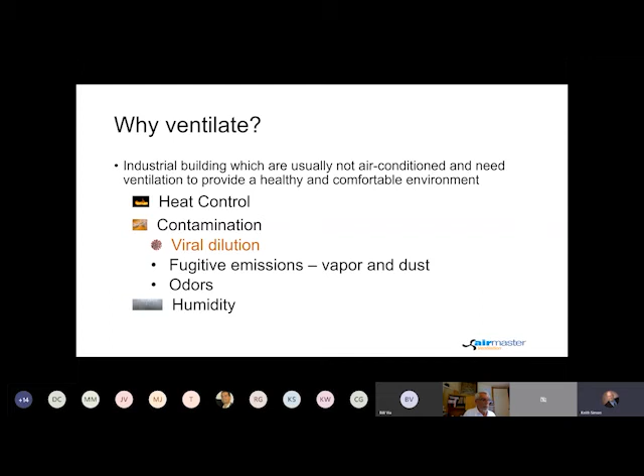But today, there's also another good reason. Today, dilution, which is what ventilation provides, can also be an effective solution to help prevent the spread of the coronavirus. If you didn't attend our recent web presentation on proper use of air moving equipment during the pandemic, you should be able to find a copy of the presentation on Airmaster's website. So the solution is dilution or ventilation.

Just for a moment, let's consider a short, narrow, long room that's just the same size as the discharge of a large fan. That fan is blowing or sucking air into or out of the room, and barring the amount of time that it takes the air to traverse the length of the room, this is just about as close to having a fan replace the air in a room. Obviously, however, few people would want to work in the middle of an air tunnel. So, with the exception of that slightly bizarre case, ventilation is dilution.

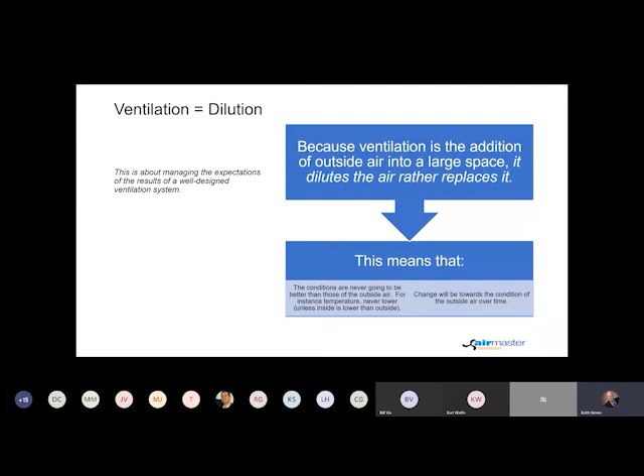It brings in outside air where it mixes with the room air, and the mixture over time becomes similar in character to the outside air. Keep in mind that the conditions inside are never going to become any better than that found outside. If it's hot outside, then eventually it's going to become hot inside.

So the primary tool and measure of ventilation is air changes per hour, which is often referred to as ACH. This is the starting point in the design of a ventilation system. But keep in mind the value for ACH, some of which are shown in the box at the right, is just an estimated value. As you can see from the numbers, there's a large variation in the recommended air changes per hour. So how do you decide on a single value?

Well, you look around at what's going on in the building. For instance, a garage that repairs only 6 cars in a large building is probably around a 20, garage repair being shown above as 20 to 30. On the other hand, a similar size garage that is repairing 12 diesel trucks would probably be a 30. So these are starting guidelines to give you a good estimation of the amount of air that you're going to need to provide for ventilation.

The only real danger if one errs on the high side with air changes per hour is the potential that all the fans won't be used on a regular basis, which is, quite frankly, by no means the end of the world. One other note, it's not necessary that an entire building uses the same value for air changes per hour, particularly where there are walls or large obstructions that effectively separate sections, then each section should be evaluated as a separate entity. This can be accomplished even where there are no walls by very careful placement of fans and thought being given to airflow patterns.

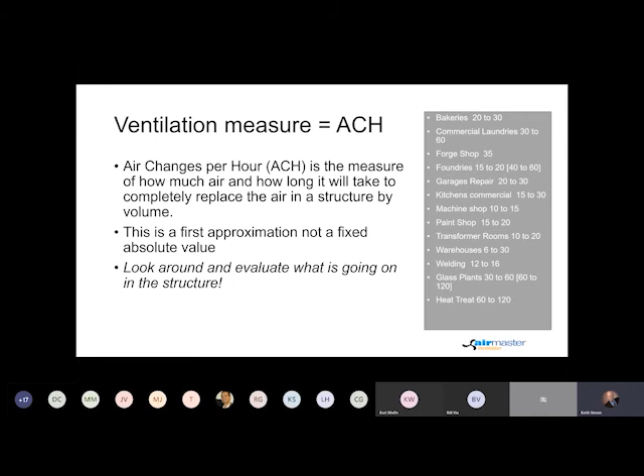So let's look at some of the special cases that were mentioned at the beginning. The first one being heat. Heat is a driving force for companies to install ventilation equipment. In some ways, traditional hot locations like foundries, forge shops, glass plants, and so on are easier ones. That's because the value for air changes per hour for these operations are already elevated to take into account large heat emissions. It's what appears to be a standard factory where problems can arise.

If you look at a generic plant, and let's just for example's sake assume that there's, in aggregate, 250 horsepower worth of motors. As it shows there, that heat from the 250 horsepower motors can elevate the temperature by 6 degrees per minute. Now that assumes that all the heat is going into the air in the building rather than warming the contents. But nonetheless, a large number of motors can substantially add a lot of heat.

So any time you go into a factory, take a look, see if there's a large number of motors, see how big they are, because this information can provide guidance in selecting an air change per hour that's appropriate for that heat load. Of course, simple thermal comfort for workers is also a driving force in acquiring ventilation equipment.

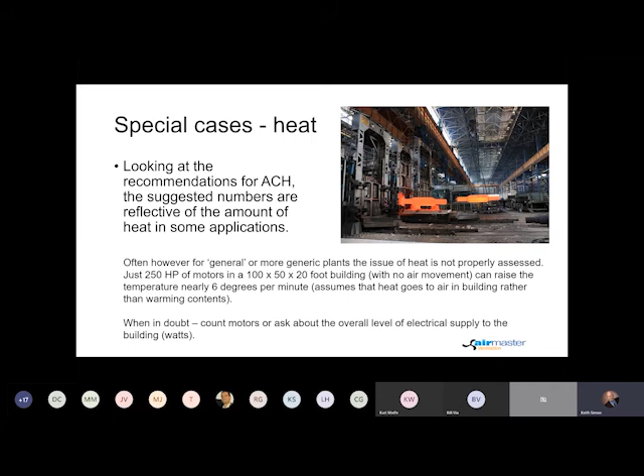One thing that is surprising, often people don't start operating ventilation fans until it's already become hot both inside and out. That's a lost opportunity, particularly in northern states where the temperature drops at night. Take advantage of free cooling by turning the fans on first thing in the morning or even some period of time before people arrive in your building. Take advantage of the free cooling, then turn the fans off until the inside temperature exceeds the outside, and then turn them back on.

Another special case is humidity. While it's not as common as heat, high humidity can cause worker discomfort at temperatures that would otherwise not present a problem. There are typical facilities such as agricultural processing, laundry, ceramics, paper making, corrugated, where large amounts of water are used or steam is used, and that water or steam is going into the air. If you see this, ask about the amounts of water used or steam used, and then we'll be happy to provide you assistance in properly sizing the equipment.

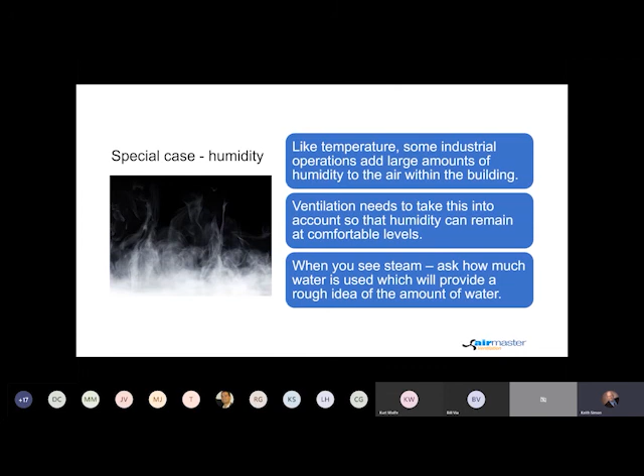Actually, a somewhat more common case, although it's listed here as a special case, are vapors and odors. One thing to mention, dilution ventilation is not a substitute for source capture of harmful vapor. And source capture means to capture vapors, odors, or any type of contaminant right at the source using hoods and ducting so as to capture the offending contaminants before they become mixed in the room air. Dilution ventilation should be used in those cases as an additional level of protection.

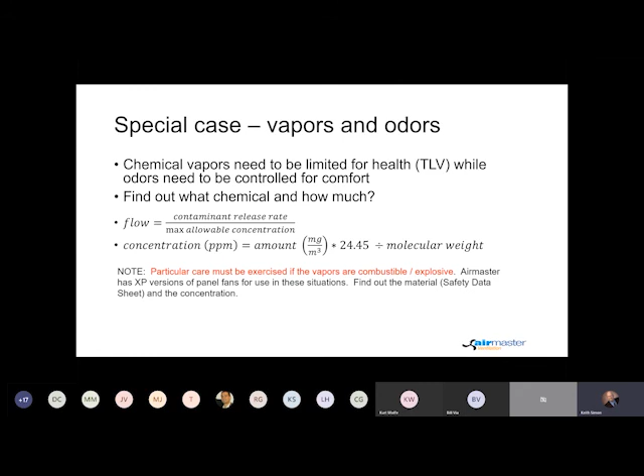One alternate for air changes per hour, or the use of air changes per hour, is the potential for having a fairly small room with a high occupancy.

Doesn't happen often, but you should be aware about it, just if you happen to stumble across something like that. This is almost always some sort of assembly operation where a large number of workers are in a relatively small space. We are recommending 60 CFM per person, which is well above the standard ASHRAE recommendation, but we recommend it primarily because of the current pandemic. It's also applicable where you have widespread operations like soldering or welding that are part of the assembly process.

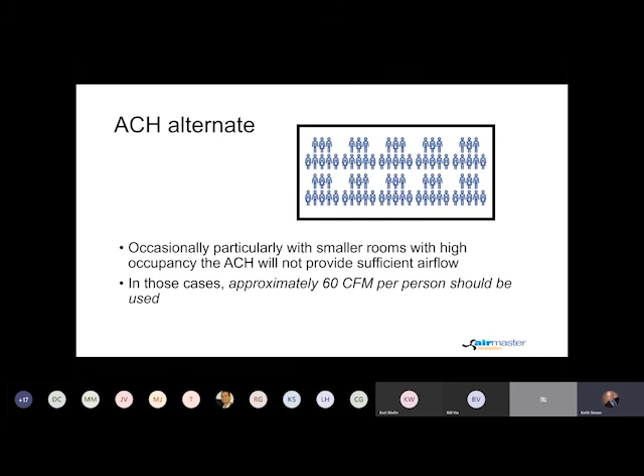So one of the things that we do stress is keep it simple. Panel fans are by no means the only possible ventilation product that can provide building fresh air. For instance, think about roof ventilators. But panel fans are almost always the best starting point because they're somewhat simpler to install. And they are available in a huge range of sizes, different power supply configurations, and with the necessary accessories for a complete installation.

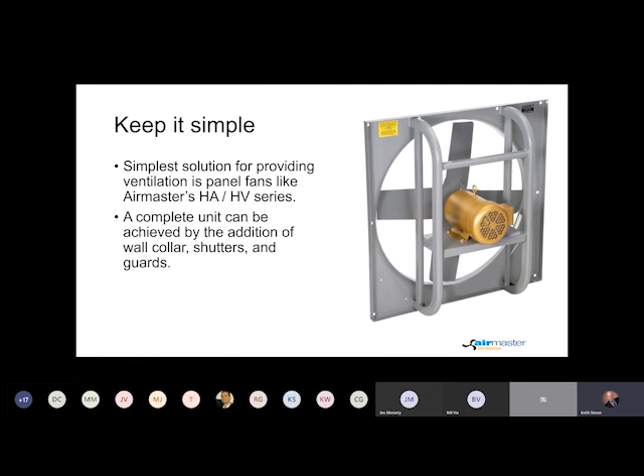One thing to keep in mind, particularly with panel fans, is that the space between structural members is always a determining factor in sizing panel fans. And you can see in the picture all the structure that's supporting that metal building and the space between those structures. Yes, it's possible to reroute or change the structure, but the cost of doing so almost always exceeds the additional cost of utilizing more smaller fans. So just keep this in mind because it's a reasonably important issue.

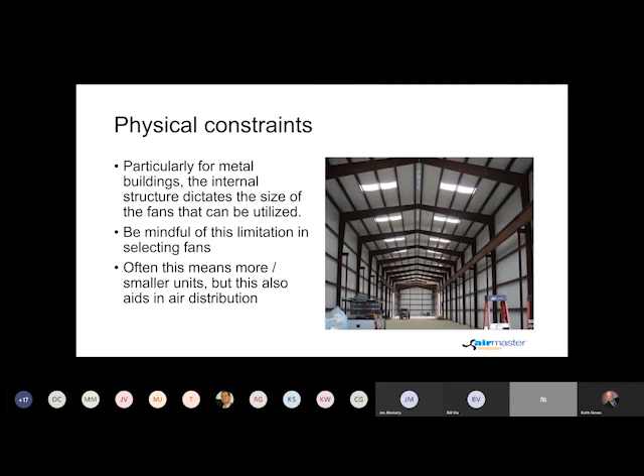We'd like to make the process of preparing a quote for ventilation products easy. So we are in the process of creating a spreadsheet that automates the process. We are currently about to start beta testing, and we hope to have this tool for you in the near future.

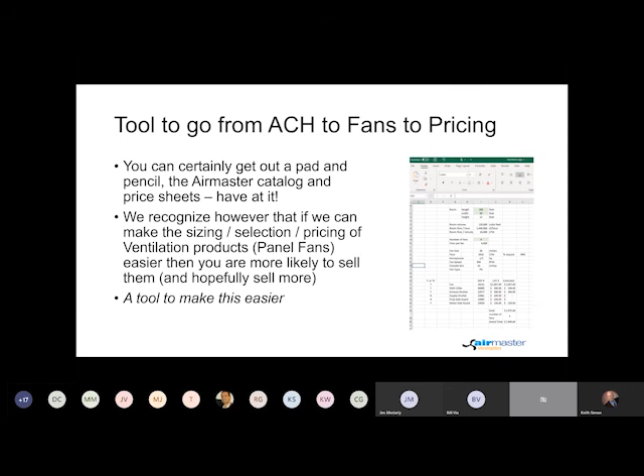Okay, a couple more pointers. You really don't want to fight Mother Nature. Mother Nature always wins. So keep in mind, air is going to go where it wants to go, not where you want it to go. It's always going to take the path of least resistance. And if this is a short circuit directly from an opening to an exhaust fan, that's what's going to happen. And warm air or humid air is less dense and will rise, always.

If one mounts a panel fan near the floor, then it's going to pull the air from that elevation preferentially. This means that the air above it is going to remain hot and stagnant. This might be acceptable in some cases, but beware. Something that even experienced ventilation engineers often neglect is prevailing winds and their effect on how well a fan is going to operate. When there is a choice, isn't it wise not to try and fight Mother Nature?

But the biggest and absolutely the most common mistake is not allowing for air entry into a building to replace the air that is being exhausted. Particularly during cooler months, how many times have you tried to open a plant door only to find that it's being sucked closed? Just my personal belief, but I think probably half the plants in the United States have negative pressure problems that are caused by fans that are operating without a source of air to replace the air that's trying to be exhausted. And yes, I can tell you that is true of Airmaster's plant at times as well.

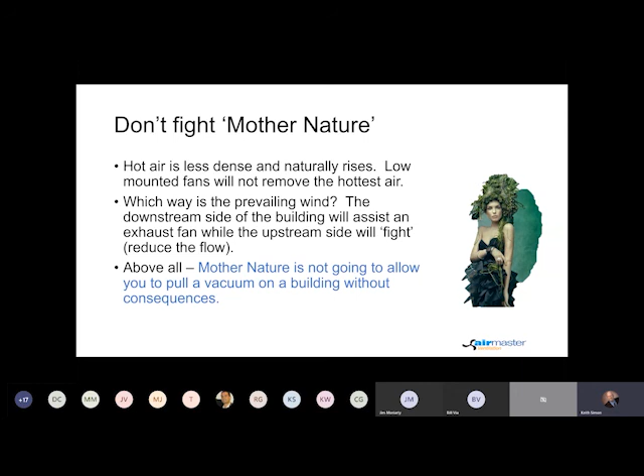So the solution to that problem, remember the louvers. When you exhaust, you must supply. For a ventilation installation using exhaust fans, louvers are the solution, and they aren't particularly difficult. Choose a size based on the physical structure of the building, which is exactly what you were doing for the panel fans. Then divide the total flow of all the exhaust units by 700. This is based on the pressure required to pull the air through the louvers.

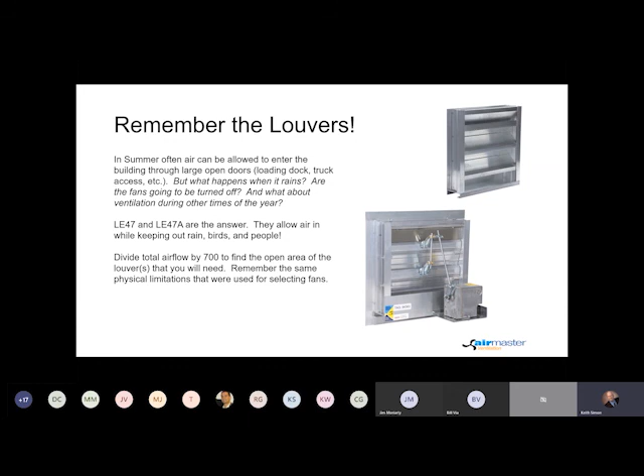That will give you a total open area for the louvers, and open area is about 35% of the actual dimensions, but it's also shown in the Airmaster catalog. And so you divide the total open area by the open area per unit, and it will give you the number of units required. So a fairly simple process that will solve a lot of major problems. So short and sweet.

Today's presentation is just the first of a series on the subject of ventilation. We do hope, however, that we have provided you some background which will raise your awareness and you'll know what questions to ask. We recognize that there are all sorts of special cases and exceptions when designing a ventilation system, and we are truly here to help.